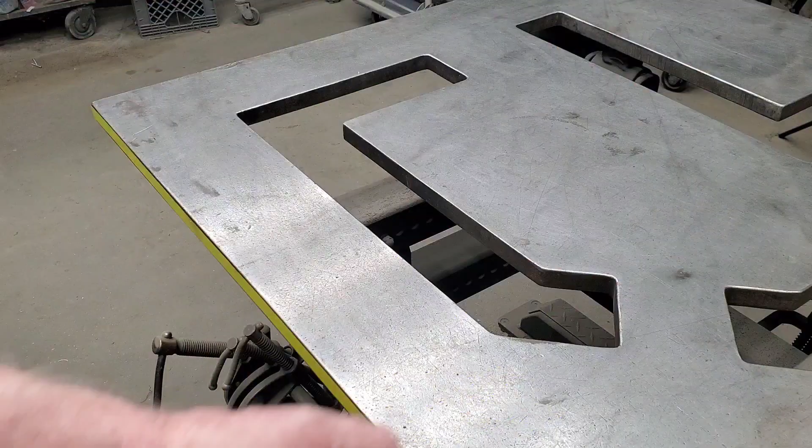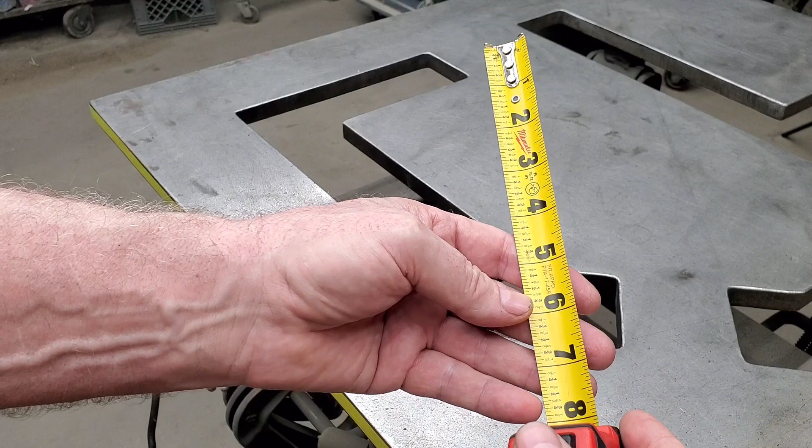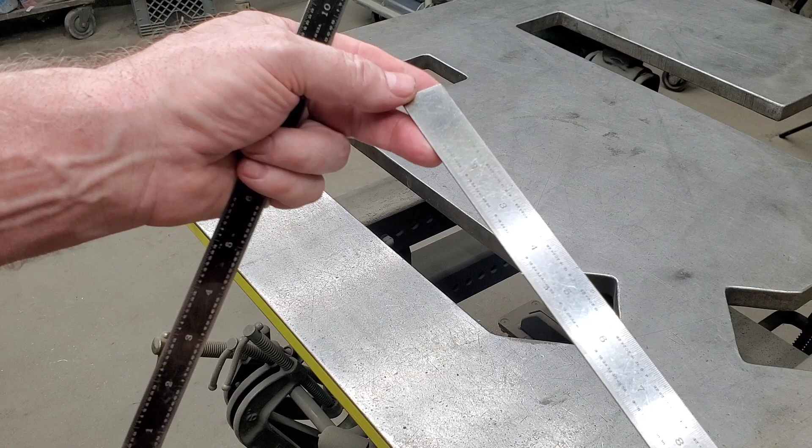Historically, this has been the industry standard: high visibility yellow with clear black markings. Almost every tape measure has this same color combination. Now when you look at straight steel scales, for example, this one's pretty common. It's chrome plated and has black numbers, but under bright light you can't read it very easily. Here's one that is black with white numbers, and all the individual markings are just too difficult to read, especially in bright light.

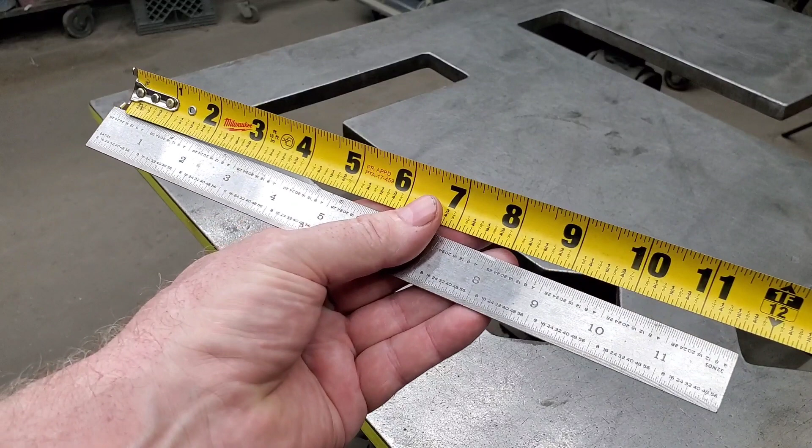When comparing the two, it's obvious which one any normal human being would prefer. It would be this here. So I've got a method of making one from a square. This is from Eastern Europe. These are popular, and they're on Amazon. I will leave a link so that you can get the correct one.

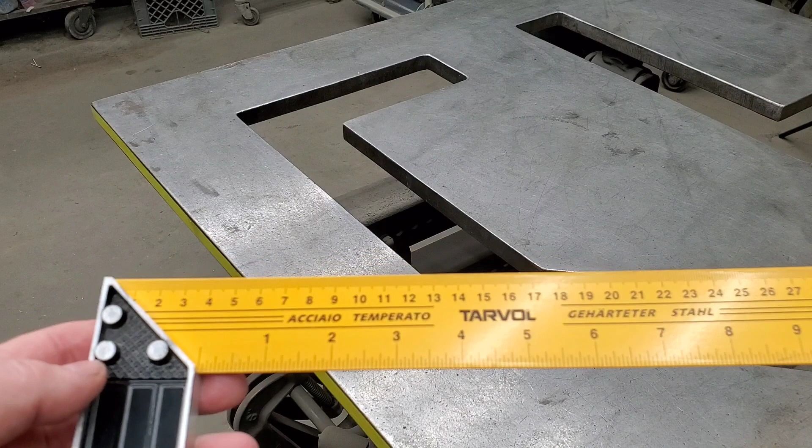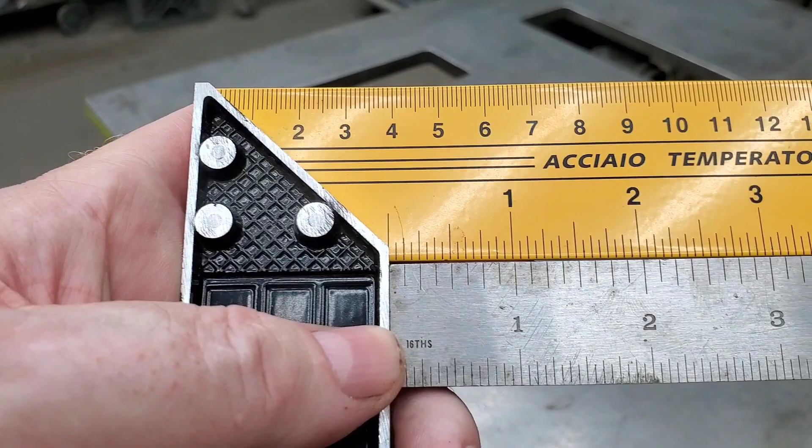These are very popular; you probably have seen these before. The complaint I continually see on Amazon reviews for this item is that this yellow scale is riveted into this aluminum body just a bit too far. If you take a look at the 1-inch hash mark, you'll see what I'm talking about. It's just a little bit off. Now for some people that may not make a big difference. But if you want something accurate, like this one made in the USA,

then we're going to have to take this apart and make a scale out of it. So I'm going to go ahead and cut out a 6-inch scale. I'll remove this part first, and then I'm going to mill everything just perfect. So we'll get started on that now.

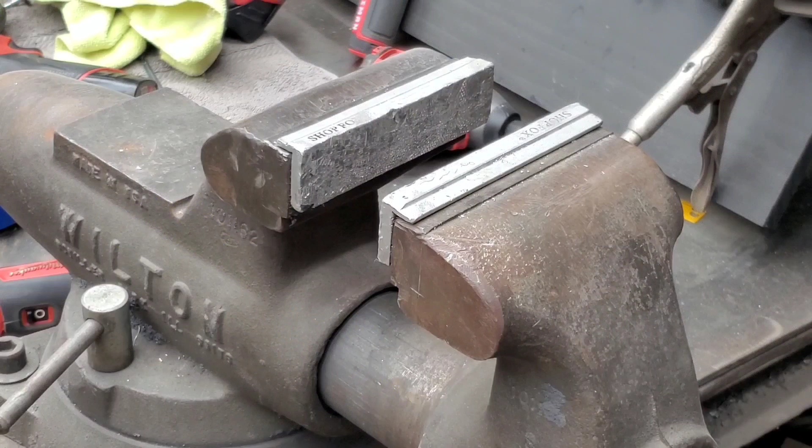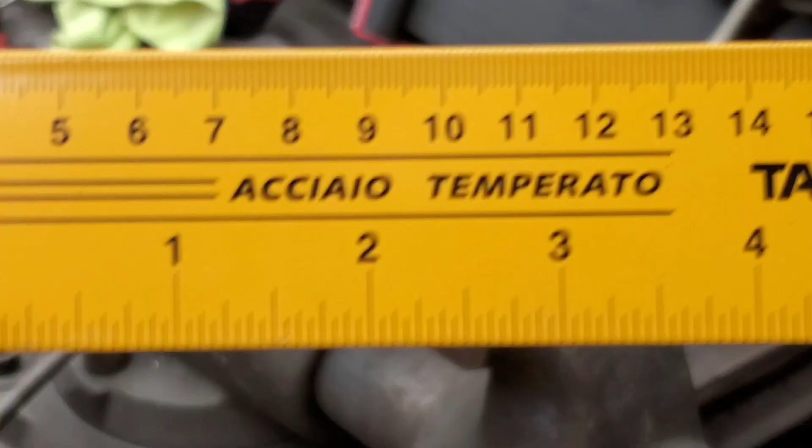So we're going to cut out a 6-inch long scale out of this, starting with the 0 right there. You see how far away we are. So the first thing that we're going to do is take out the cutoff wheel and cut this long ways.

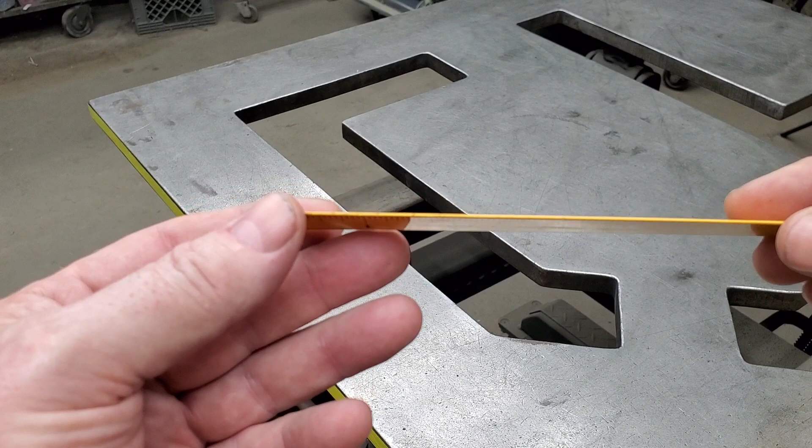So we're back with the finished product. I've deburred all the edges. It looks beautiful. We now have a straight scale, flat. And I want to go over something.

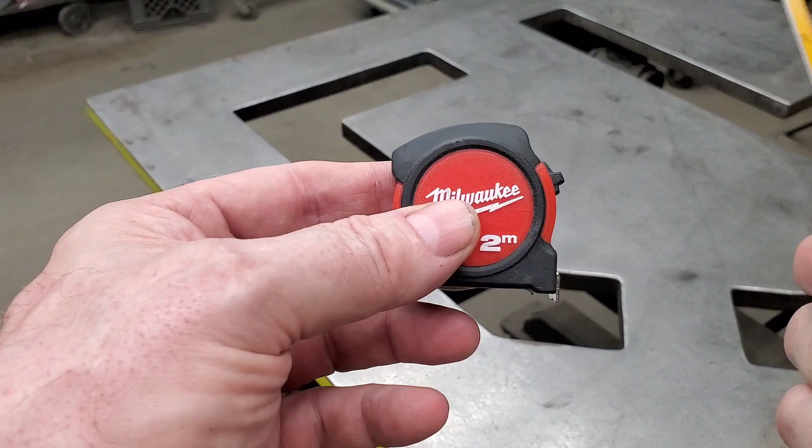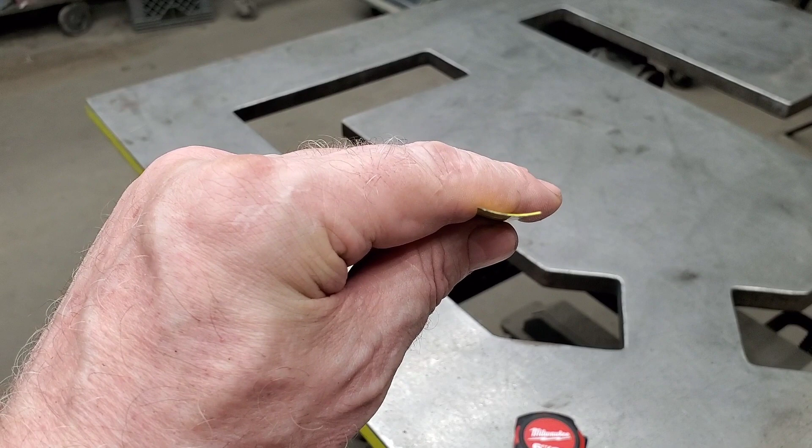I've wanted something like this for a long time. I've taken a brand new Milwaukee tape measure and cut out a scale, just clipped it. Here's what it looks like. I've used this for years because it's high visibility. The problem is this thing doesn't lay flat like all tape measures, they're curved. So it's not suitable for using it to scribe lines or to lay out cutting marks and things like that.

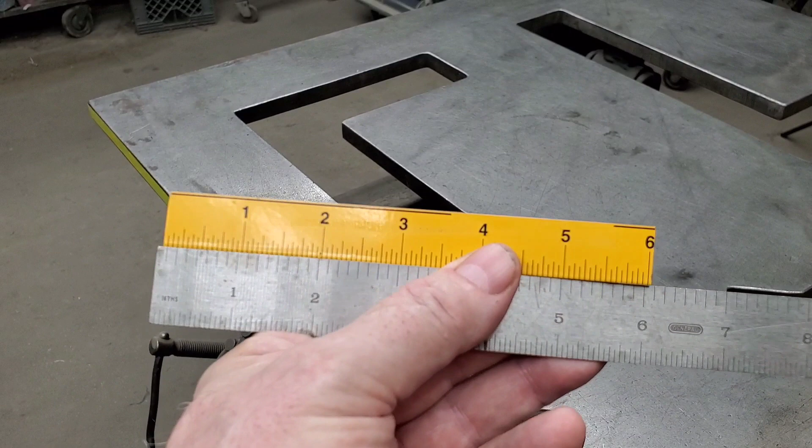So it's always left something to be desired. I finally have one that is much better than what you would see out on the market today with the chrome plated ones that have a lot of glare, especially in bright lights. You can see that the yellow scale does not have that problem. Plus it's flat like this scale. They're both flat, so they are suitable for scribing lines and marking pieces used as a straight edge. And the milling came out really nice. And it's extremely accurate.